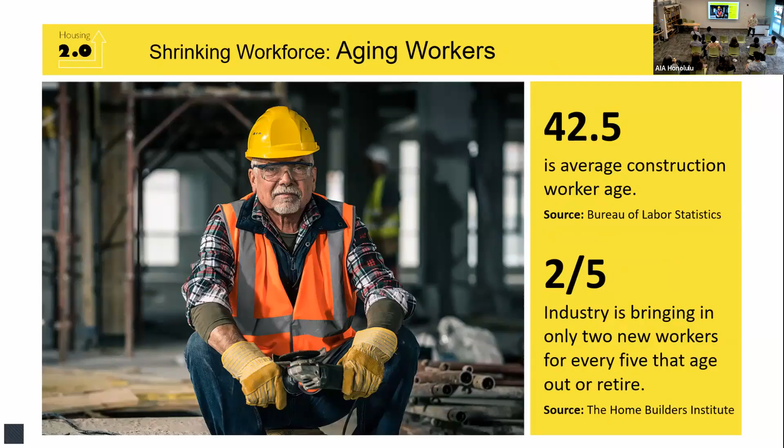Our trade shortage means 94% of construction firms are struggling to find workers. That's a problem because currently the average construction worker age is over 42, and the pipeline of new workers to replace every 5 that are leaving is only 2. So only 2 workers are coming in behind 5 retiring, while the construction workforce is already very old. We have a huge problem of where the workers are going to come from.

When we look at advanced manufacturing and how it can reduce costs, McKinsey & Company suggests it's a $200 billion productivity gap costing the industry that could be closed by using advanced manufacturing methods. That explains, in their analysis, why construction is so far below every other industry's productivity track record over time - about a 2x difference, with construction being the only industry decreasing in productivity.

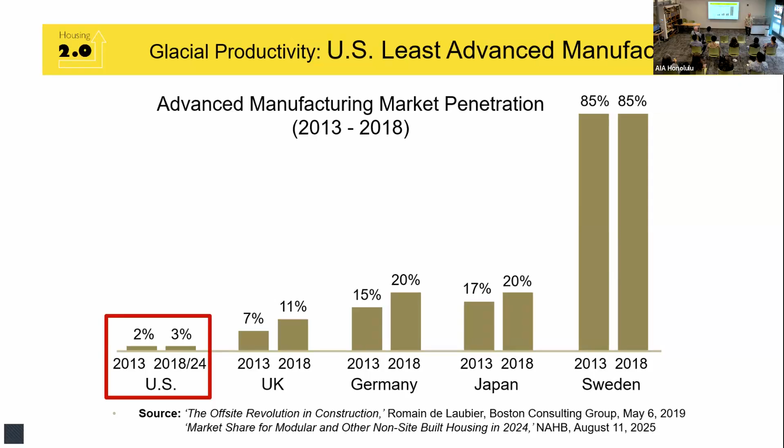So here's a $200 billion solution, and we're among the very last countries applying this innovation, whether it's digitization or advanced manufacturing. This data is from 2018, when we were at 3%, while other countries were growing from 7 to 11%, 15 to 20%, up to 85%.

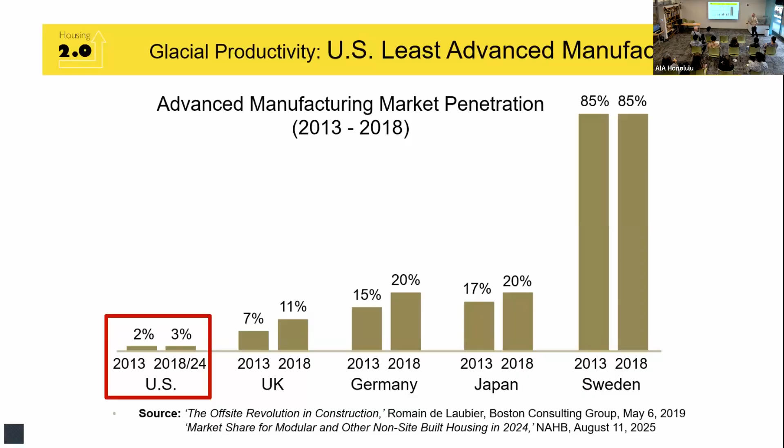In 2024, NAHB suggests that advanced manufactured solutions are still only 3% of the market, not counting HUD code homes, which are a different product for different markets.

So what do we do about all this? We have a 3-part crisis: highest income-to-housing ratios, a workforce shortage, and productivity problems. What are the solutions? What I'm going to suggest is that we have to optimize housing.

Where we're excessively hurting, we have to use optimization innovations to get better. The first innovation is going from excessive waste to optimized, lean practices - and I mean waste in all its forms. We can't waste land, we can't waste space. We have natural resources that can provide free heating, cooling, and fresh air - we have to leverage those. We have to make energy waste zero, and we can't waste in construction. Every element of what goes into a home, we have to eliminate waste. So waste is the biggest topic I'll cover - it covers a lot.

Then we have to go from excessive complexity to simple. We can't afford the kind of complexity builders believe many homeowners want. It turns out, from all the surveys, it's just the opposite - homeowners are wishing for more simplicity.

And then, systems as an afterthought is excessive - we have to move to fully optimized systems integration. Mechanical systems are an afterthought, storage is an afterthought, integrating solar and technology into a home - all of those things are an afterthought. If they're fully integrated, as they are in every other industry, there are huge cost savings just from integration.

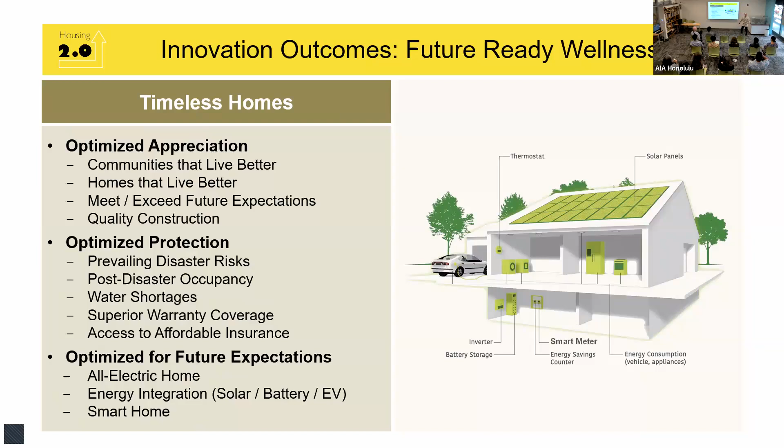The last wellness element is future-ready. The things we do will optimize appreciation, optimize protection against disasters and insurance and water shortages, and optimize for future expectations people have—smart, all-electric, energy integration, all the things we know are coming. So there's a lot here to get to, but all this ends up to big savings for how we get better for less.

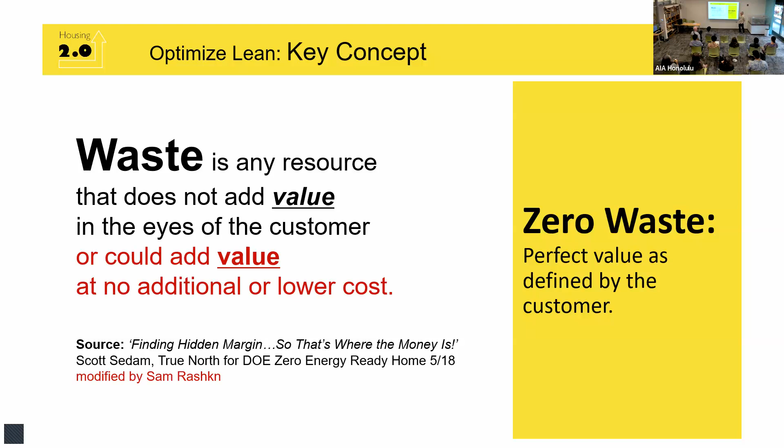Let's start with lean. I mentioned this is the biggest item because lean encompasses so much, but the key concept is waste is any resource that doesn't add value in the eyes of our customer. This is a quote, a concept from Scott Sedam—he's a very nationally, globally recognized lean waste expert who consults a lot of builders. I built on his definition of waste by adding 'or could add value at no additional or lower cost.' A lot of things we're going to cover today are where we have the opportunity to extract value at no cost or lower cost. That's waste, and we're going to really attack it.

So how do we start? Let's start with land, and let's get the most out of each lot. A lot of this will be in the full reference, we won't cover all today, but the two most important things you got to do in any piece of land is optimize views and manage topography. That's why these two are where everything begins. When you give them a raw piece of land and I want to provide housing, I got to get these two right first.

There's some natural views that can be captured. I have to get the most amount of lots accessing those views, but I cannot take any risk of drainage problems. That will completely destroy the user experience living in a home if there's erosion issues and home getting wet issues.

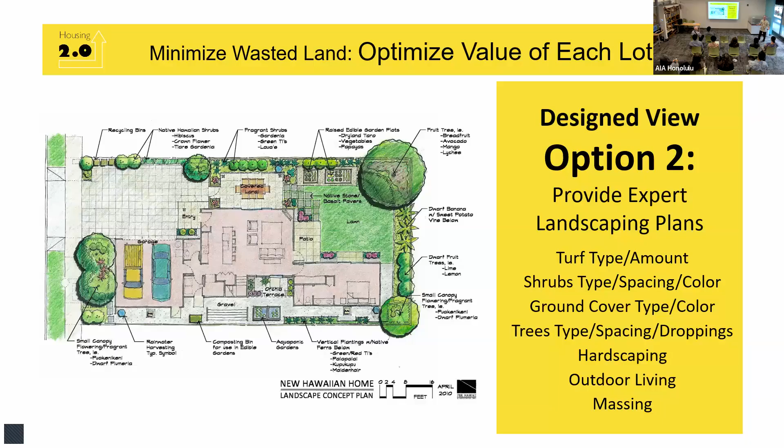When you make that choice, with the long, narrow footprint you get much less access to the backyard, whatever room happens to be there in back. Much less access to daylight, much less access to the street and community connection, and more hallway. I haven't had any homeowner yet, in decades of being an architect, ask me for more hallway space. It's never come up. So it's no value, yet I'm adding square footage.

With the square shape, all those things get better. I've got 10% less walls with this nearly square shape. I have double the view to the back, double the connection to the front, and more daylight. Everything's better at lower cost because I'm saving 10% on walls, maybe a few thousand dollars, and I'm also saving 10% on energy bills because I have less exposure. And I can get the same number of lots because it's the same square footage of land. It's a big difference - all from the geometric footprint in the planning process for whatever subdivision or community I'm planning.

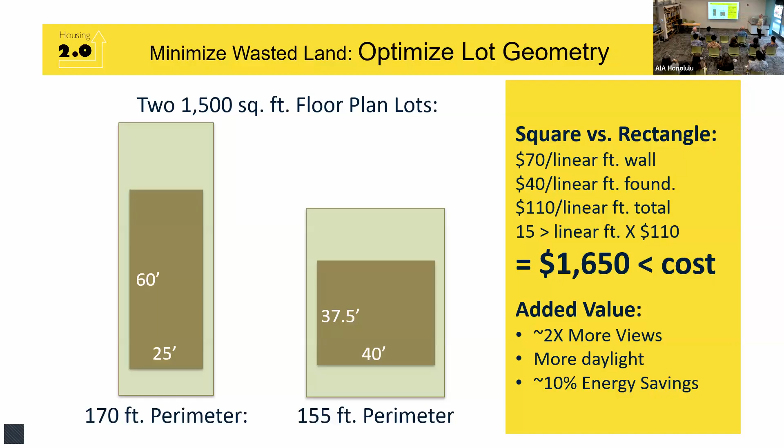The next thing is allocating open space. The value of open space, by one study, is $13,000 increased value for each housing unit located within a quarter mile of protected open space. I often show communities in the mainland - like Savannah, Georgia, and other communities with open space - that have 40-50% premiums because open spaces are built into the neighborhood. So over time, the cost of housing you're missing because you left the open space is overwhelmed by the appreciation benefit of having it.

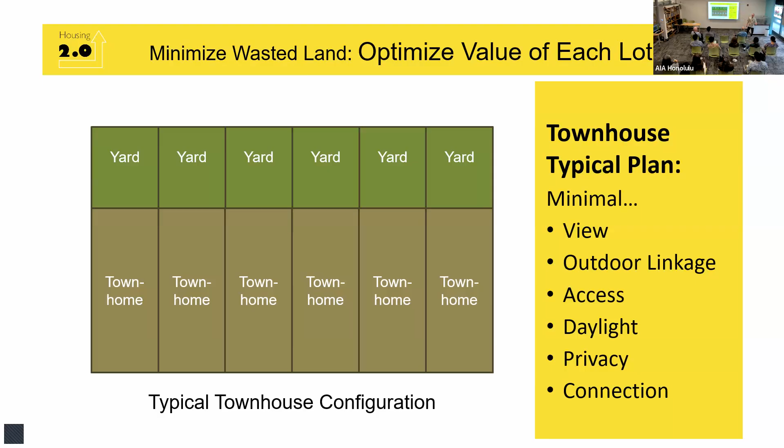So can we do better for less? This is the outcome - again, there's almost no connection, it's all garage. Then you go to the back and it's useless because it's not adding any value, hardly any access, and neighbors can look into each other's space. So get rid of this if it has no value, and repurpose it for more units to do things that are better.

So if we go to an L shape, get rid of the back that has no value, we create a valuable courtyard outcome that works completely differently. First, we can create a quiet side so we have complete privacy to our courtyard. When we look at the outdoor linkage, the entire footprint now has linkage to a desirable open space on the property. The secret sauce is people come into the courtyard to the house - we have a full front room and a full front lanai, community connection - instead of maybe an entrance walking through these rooms and breaking them up. So the middle entrance gets rid of the hallway space that adds no value.

Everything's being done with this lens: how do I make every square foot add value? How do I make every square foot of property add value?

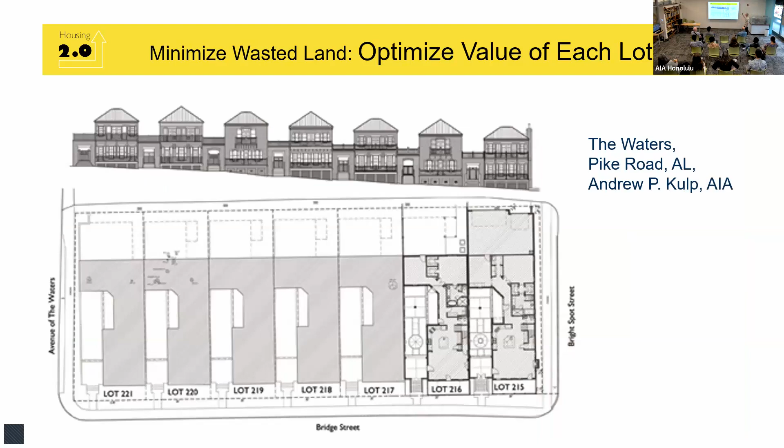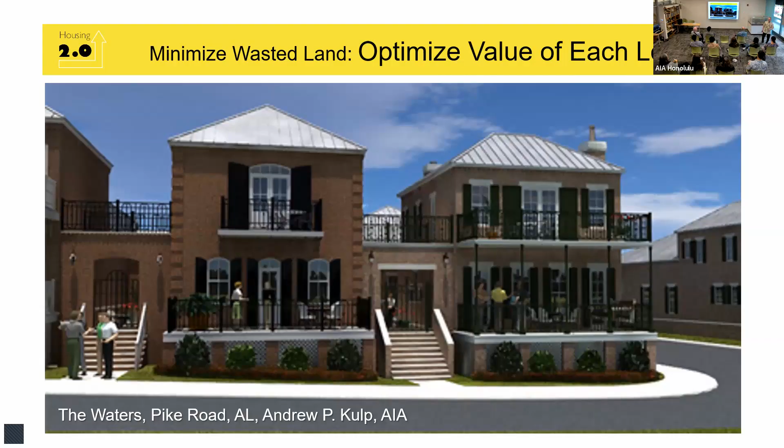Let me give you an example where I had to do this exact kind of thing with a client. This was their project up in Vancouver, Washington, which is a suburb of Portland, Oregon.

So they're building these duplex units. You wind up with no place to park. It's too narrow in the community. You have all the garages up front blocking any connection. These yards are set for access and daylight, but they're not useful. The side yard has no use. All the outdoor space almost has no use.

So I get daylight, connection, privacy, parking - the yards aren't useful, no access to it. This is how we can fix this kind of thing: just make it more narrow and have almost like a courtyard effect with the wider, narrow yard. Put the garage in back, using the backyard space that was wasted. Now the yard has full functionality. We have a front porch and we have connection - all the things we need to have.

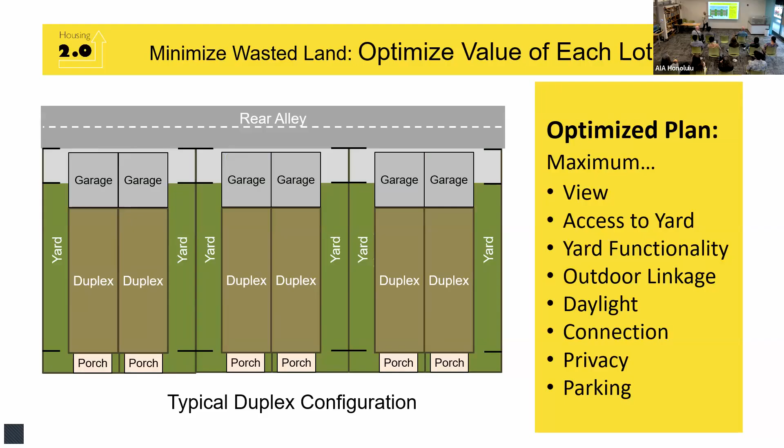So this is the floor plan. What we want to do is just use box shapes to show you here's what we had, and here's how I can make it work in a narrower footprint. Now I get the garage in back, I get that side courtyard kind of effect, and the rooms are all the same or bigger size from what they used to be. No extra square footage, no wasted space. Trash is in the back, cars in the back, front porches and streets.

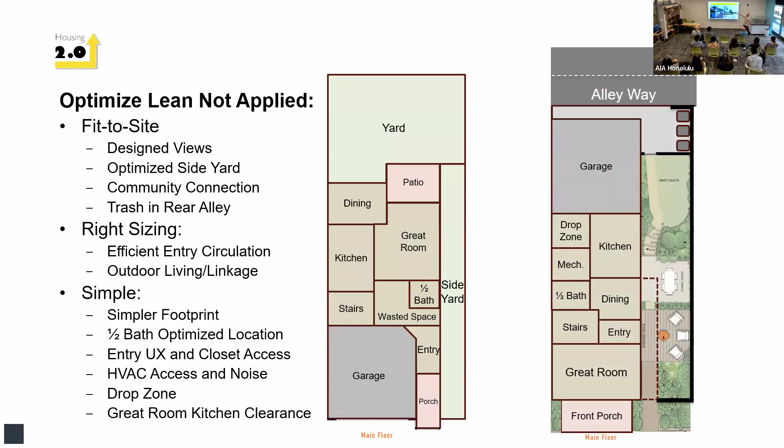So what we've done, we've gone from this, which is the actual project that's already been built - again, it's trash cans, it's cars, there's nowhere to walk, there's nowhere to park - versus we can have this kind of effect. Which street would you rather live on?

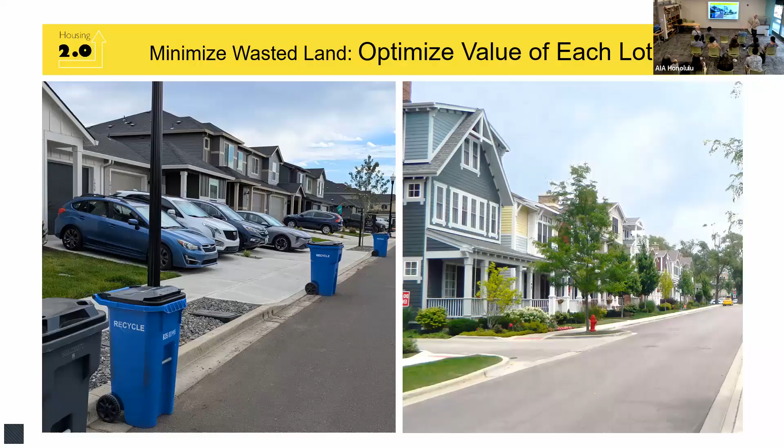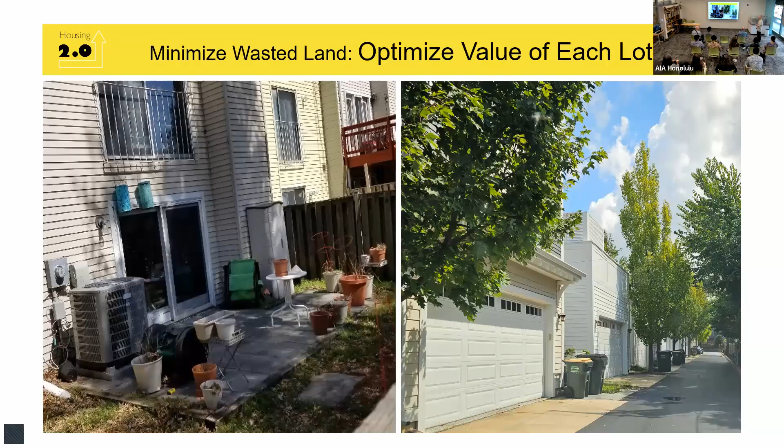So this is, again, trying to say: optimize - stop wasting any square foot of outdoor space, stop wasting any square foot of indoor space, and really apply best practices for connection, for daylight, and so forth. Research shows social connectedness is great for disease prevention, lower rates of anxiety, stronger immune system, better cognitive function - all these benefits.

You see it basically in neighborhoods that are designed for people to get out, to be active, to connect to the degree they want to. I'm not saying you have to meet everybody every day, but whatever amount you're comfortable with, you have access to it because it's designed better. 50% better chance of staying healthy, increased longevity - and that's with a study of over 300,000 participants.

So there are the options: there's Koa Ridge with a garage-dominated street, and here's Hawaii Kai. We have the ability to do this - I don't care if it's low income developments or high income developments. This isn't any appreciable cost. It's designed by design, it's integrated into our thinking and planning from the very beginning.

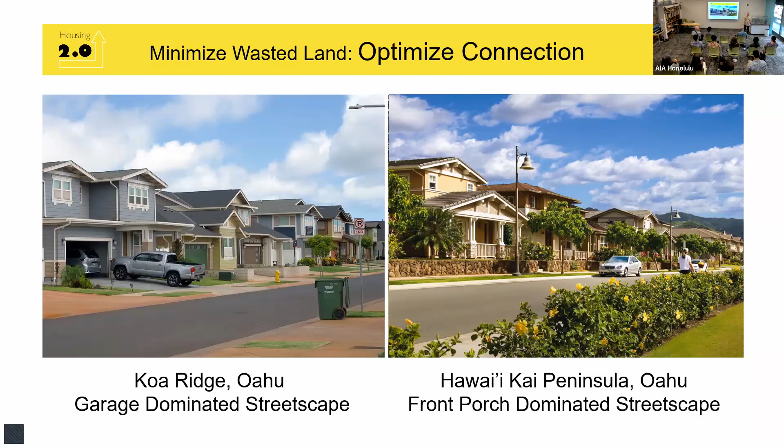To show you it applies to almost any level, I want to give you an example of what's done for a homeless village. This is the Other Side Village in Salt Lake City, Utah, but it can be done anywhere - it could be here in Hawaii, the same way. They applied all these concepts for a homeless village.

The first thing they did was find a piece of property that was just being used for garbage, with people throwing debris there. So rather than NIMBY being a problem for a homeless village, as it normally would be, they took a blighted piece of land and repurposed it so it would provide so much value to the community, providing a place for the homeless village.

And then they converted it with open space, connection, a wellness center. It had guidance and community farming for healthy eating, skill training for getting jobs and moving on to your own life, as customized designs that were advanced manufactured. All the things we're talking about were done to empower individuals to move beyond chronic homelessness.

So this is kind of the design. Went from this being just garbage bins and trash all over the property to a beautiful development. So they actually help the neighborhood rather than hurt it.

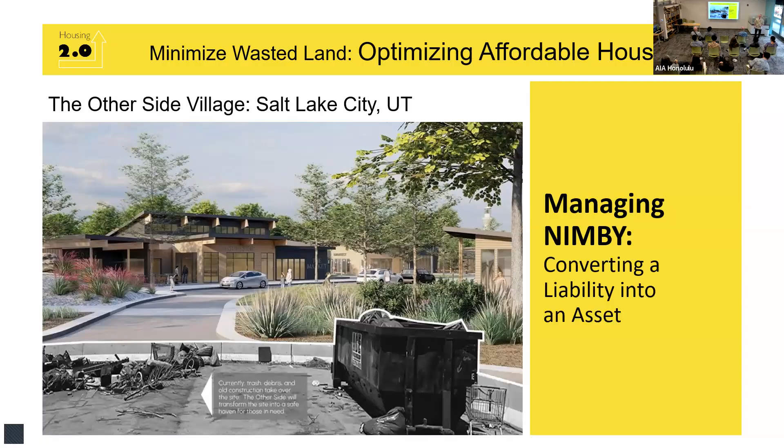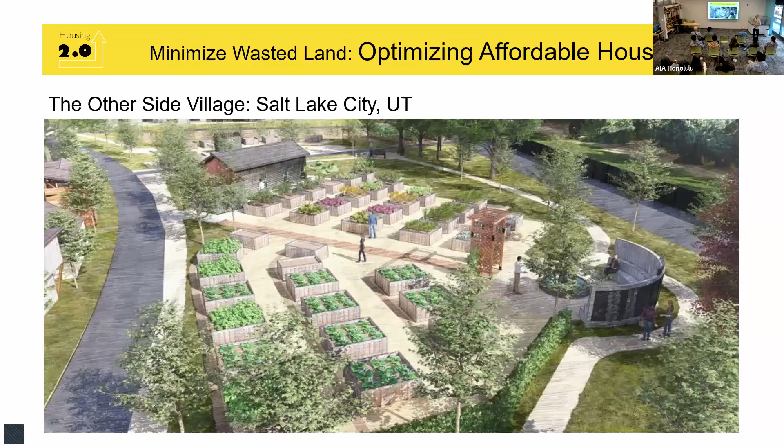And then they mass produce these living units in a factory. Would be kind of tiny homes. Then they put them on property with trails, with open space. Again, you see front porches on homeless homes for connection. Everything they're doing is applying the same fundamentals we're recommending. It had community farming for healthy eating and training about healthy eating and skills development. And these are the kind of results that you get.

In their case, with the first block of, I think, 170 and adding another 400, because they got these results, it's just amazing outcomes. 100% housing stability, formerly chronic homeless, now in permanent housing. 100% sobriety and recovery for the majority of them, coming in with all sorts of issues. They help them right away. 100% employment. The skills they gave them led to jobs for 100% of the residents.

75% got better health. But the costs, this is lower costs, this is better for less. They reached 185 million in savings due to reduced costs of emergency services, shelters, police, ER visits, detox, healthcare, all of the costs that went away for these residents because they went with this approach, plus they all had higher incomes when they left, obviously, from where they were.

But you've got to measure results, because then you get the funding to do the next phase, the next phase, and the next phase. And concepts just work over and over.

And I'll leave you with this about wasted land: everything I'm talking to you about is in lockstep with what they find are the fundamentals for how blue zones work. One, people move naturally. Having open spaces, having community gardens, having trails, having ways that people interact creates movement and activity. It's incredible for health.

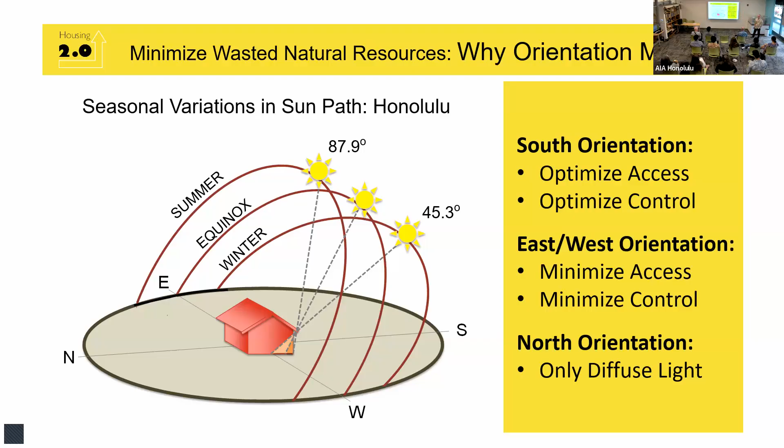North is good for diffuse light, right? The big thing is orientation gives you control, helps you create better environments. In absence of it, this is what you're doing: people have to basically just put blinds in front of windows all day long. What is the purpose of a window? Anyone guess? Why do we have a window in the first place? Why don't we just make solid walls?

Ventilation, maybe fresh air. Egress, get daylight - that's what mitigates the purpose of the window in the first place.

If you don't consider orientation - east-west lots, if your home's oriented front to back with the windows - it's easy to do, it's just not being thoughtful.

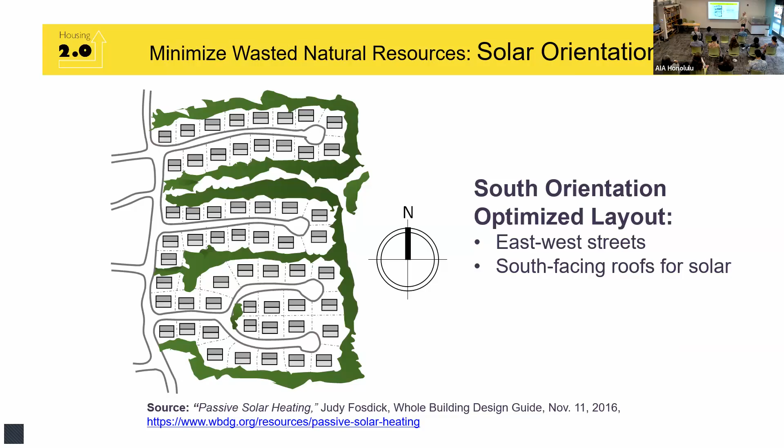If you do it properly, basically it's 45% free cooling. This is a study in California, and if we're cooling in climates like Hawaii, which is like the California coast, about 45% savings just from orientation.

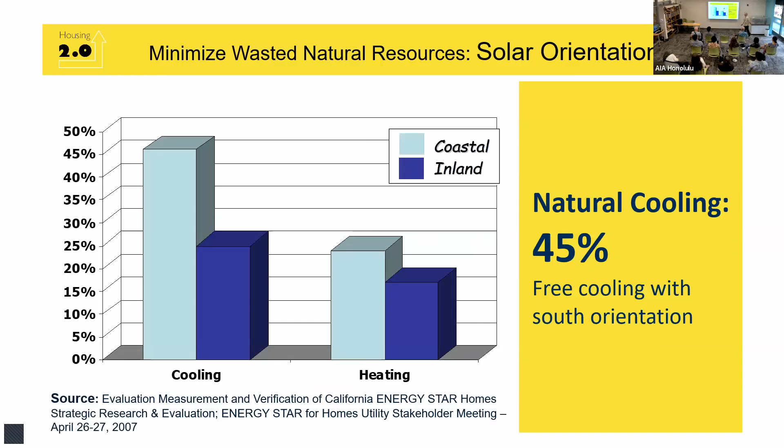But more importantly, natural light - I put the blinds up all the time because I'm getting all this glare coming through, versus if I manage the orientation, I get all the natural light.

98% of homeowners, designers and architects score natural light as a top home feature. And again, you're blessed with it here in Hawaii. It's a natural resource you want - you don't want this, you want that.

It improves vitamin D, wards off seasonal depression - though that doesn't happen so much here in Hawaii - improves sleep, and enhances productivity.

So like I said, we want to do stuff that's free that makes things better. It costs zero - that's orientation, free heating and cooling, free cooling, summer comfort, superior comfort, thermal mass.

I'll talk about thermal mass in a moment. Natural light, natural cooling, fresh air, and resilience - if it's a really long, protracted hot spell and you've got a power outage, you can float with thermal mass and orientation.

So I believe this is worth tens of thousands of dollars. If it reduces your electric bill for heating and cooling by 30-40% over 30 years, that's tens of thousands of dollars.

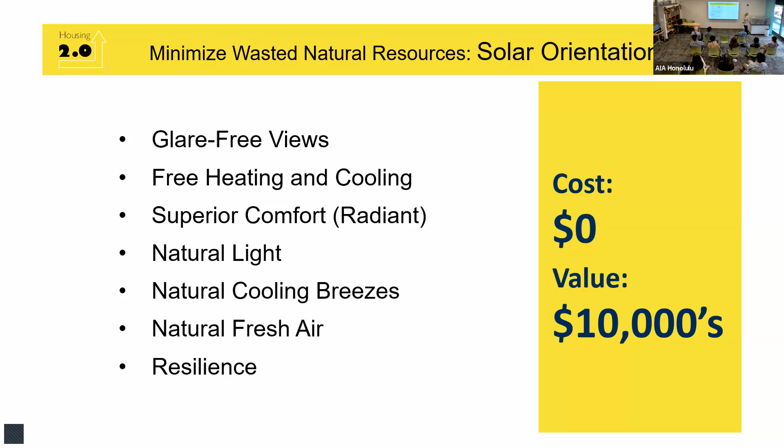Here's an example with another client. This is the original site plan. Here's north, here's south - all the units front and back, 85% of glass facing east-west.

Which means all those units have the blinds closed every day, all day. But 100% of units are basically exposed. It's unbelievable - 29 units, 0% optimized comfort, with lights blazing.

So all I did was reconfigure it this way. I got 33 units - 4 extra units, right? And basically all these units are now oriented north-south.

Plus I threw in a couple of pickleball courts because this is a busy street - no one's going to use that playground. And you can see basically...

Not spending more money, and I have 4 more units, and they add value. It's being thoughtful about natural resources and getting to better answers.

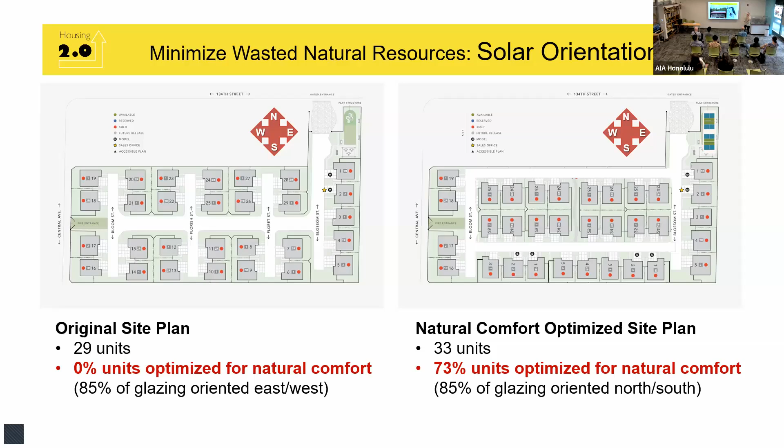The surface of stucco will get up to about 140 degrees with the sun hitting it. We're stopping all that - thousands of nails in the wall are perfect conductors of heat, so we reduce the heat getting through into the studs and into the house.

And I mentioned thermal mass. You don't need thermal mass for heating here in Hawaii, but with the 45-degree angle of the sun in the winter and all the sun coming through with south orientation, it's nice to have a thermal battery to store that heat so you don't overheat during the day.

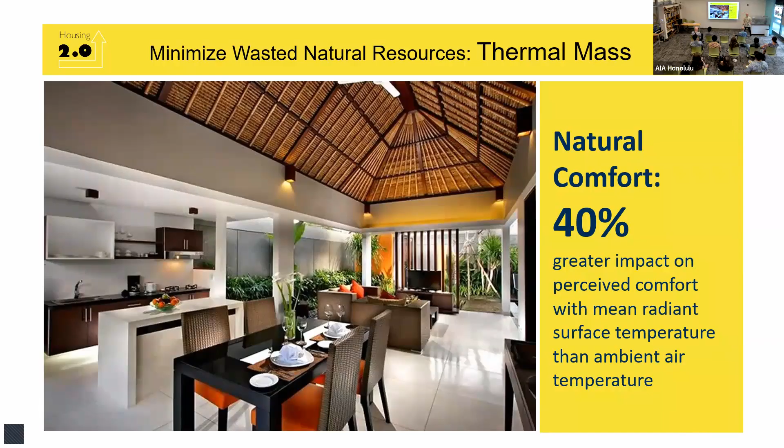So you get 40% greater comfort by controlling the mean radiant surface temperatures - that's what thermal mass does for you, gives you a little bit of control. So if you have slabs, I might consider using tile rather than trying to put a wood floor on top.

Here's an example of how you can be thoughtful doing all this. This is Kumuhau nearby, on the island of Hawaii. This is a development that's oriented to prevailing breezes - it's using the overhangs, it's capturing the sun, it's capturing the breezes.

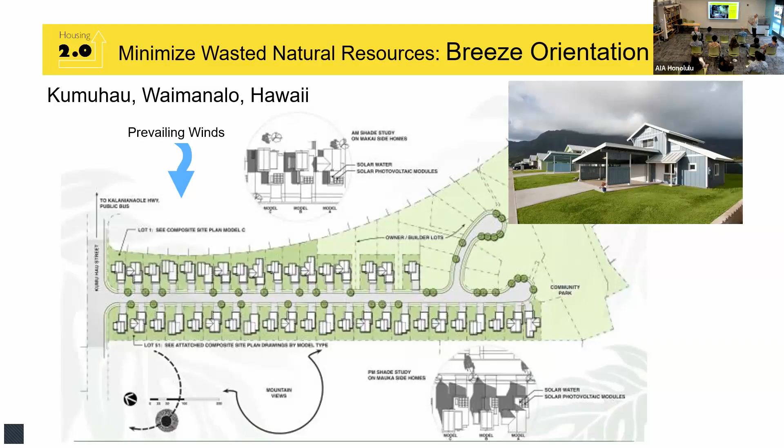We have examples where we're doing this - these are good examples to follow. And again, when you see a home that's just capturing all this fresh air, you know it just feels great inside. And casement windows are your friend.

They give you the full aperture, but the big thing you have to know is which angle, which side do you hinge the window on - that's in the book, we discuss that in greater detail. It's amazing the difference in how you make the casement windows open.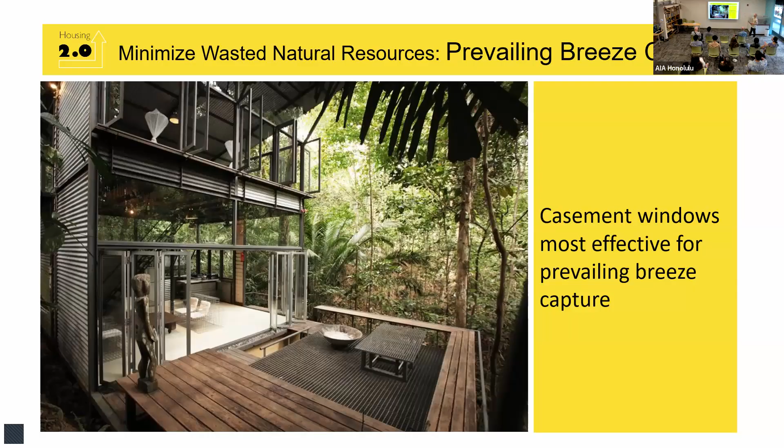Cool roofs are just a way to, really effectively, with no moving parts, reflect more sunlight, so you get a 40-degree improvement in the heat that comes through the assembly. So that's a big benefit.

So here's Bermuda, another island on the Atlantic side, where every roof is almost white by design - just to get all the benefit of that free cooling.

In contrast, it's just as hot in Melbourne, Australia, yet there's a real prevalence of dark roofs, which absorb heat and exacerbate comfort and cooling problems.

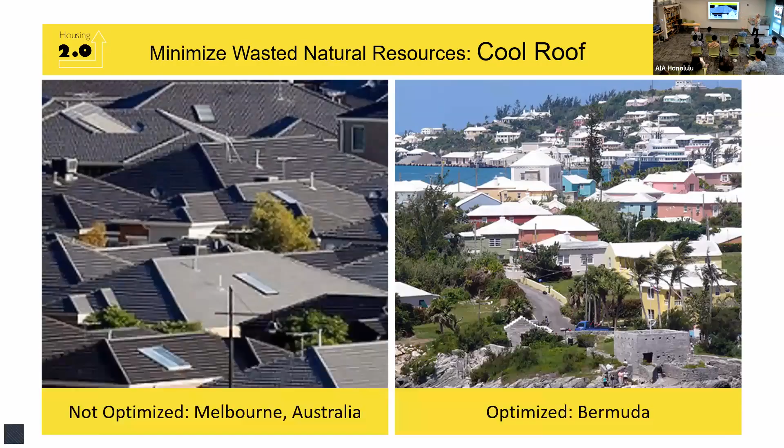And cool roofs can come in standard shingles, so you don't have to sacrifice design - you have a lot of design choices.

Right sizing is about maximizing the value of every square foot you put in, at the highest level. You do that two ways: you optimize the space you have, through geometry, floor plan, circulation, and you want to minimize but make feel generous with built-ins.

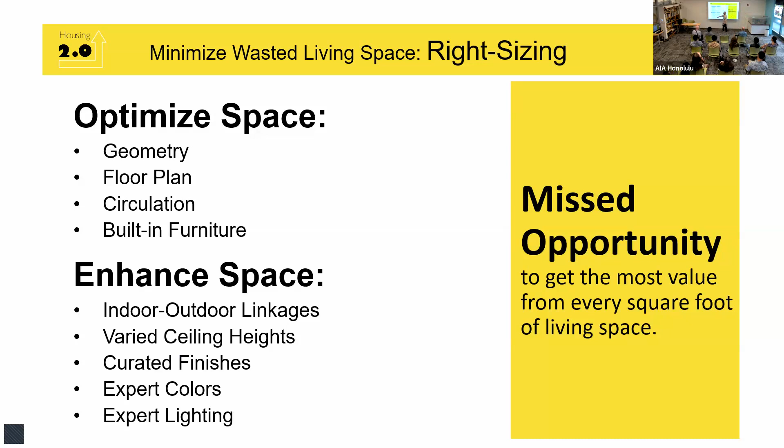Then you want to enhance the space you have so it's perceptibly bigger and lives big. You do that with indoor-outdoor linkages. When a room continues on to the outdoors, it just lives bigger. Raising ceiling heights, or varying ceiling heights, makes rooms feel bigger. Curated finishes, expert colors, and lighting all contribute to being sumptuous.

This concept has been embraced by the auto industry. Here's a 1970 Impala and a 2020 Impala. There's about a two-foot plus difference in the wheelbase. This one has the same or more trunk room, headroom, and leg room, has more storage space inside with cup holders and everything else, better safety features, more reliable performance, and better acceleration. Everything's better about the car, but it's smaller.

We can do the same thing with housing. So one of the first big things we do...

Open floor plans just make spaces feel bigger, a 20 to 30% bigger perception of size. Indoor-outdoor linkages are great because almost 90% of homeowners want to invest more in outdoor living. Here in Hawaii, we're better suited for that.

When you have indoor-outdoor linkages, a room feels so much bigger, it just extends outward. And then capturing outdoor living, having useful spaces outdoors, matters too.

This is one of the more controversial concepts I go over a lot. Let's start with research about clutter. Basically, clutter creates stress, increased cortisol levels that become chronic, and an inability to focus that kills productivity. We all see this every day — if our desks are cluttered with papers and we're not getting to things, we almost become paralyzed in productivity. Our homes are no different.

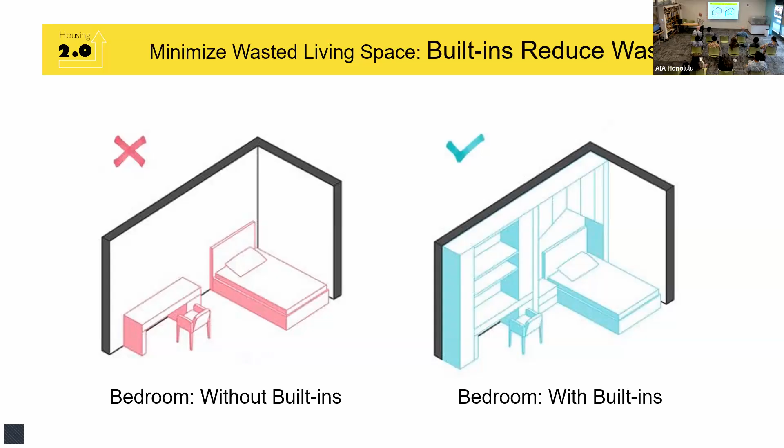Here's an office space with a freestanding desk. If we have a built-in desk, shelves, and storage, everything feels bigger — just a small alcove creates a more functional, more sumptuous office, and a bigger overall office space in the house.

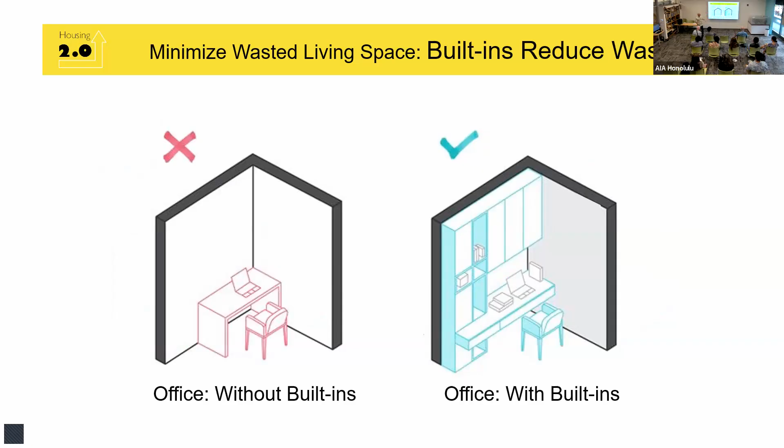Here's an example of how this all applies. The space below a stair is usually dead space, often used for a minor closet that has very little value. In contrast, by investing in one desk built-in here, one unit here, and some shelving — not a lot of cabinets — I've converted a small, minor-value closet below a stair into a work-at-home space.

And the value here is maybe 5 to 10% higher per home, because instead of a 3-bedroom, 2-bath house, I'm a 3-bedroom, 2-bath house plus a work-at-home office, all by taking a hardly useful space and converting it.

At the very least, even built-ins can make the space so much more attractive, more storage, display. So I have this constant battle with builders about investing in built-ins. Again, it's going to be cheaper with the square footage you offset to include them in your home.

So here's an example. I have built-ins everywhere. This is a design I did that'd be a great way to do a house in Hawaii with plantation style architecture, a lanai in the front, a lanai in the back, mounted kitchen cabinets, island, work-at-home space, a large screen TV and living space.

You have a huge master suite, large closets, storage, compartmentalized showering and commode, 2 sinks and a bathtub, and then compartmentalized bath, bedrooms with dresser and shelving, dresser and shelving and desk and shelving, dresser.

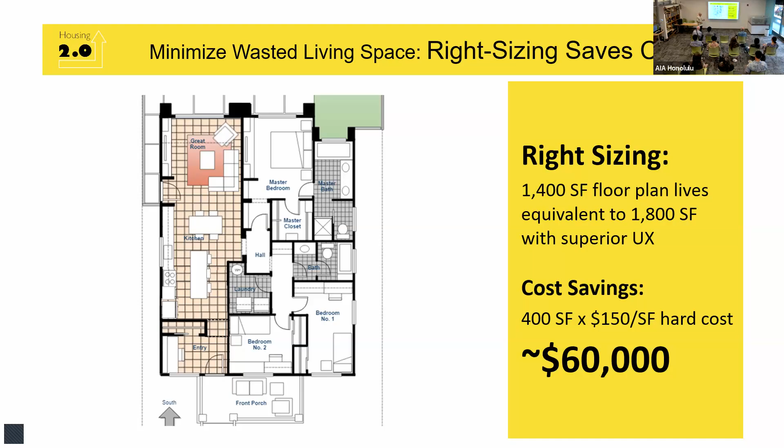But basically, this is when it all comes together. This is how we get the kind of cost reductions I was promising you at the beginning. How do we get 30–70% cost reductions? So right-sizing is great.

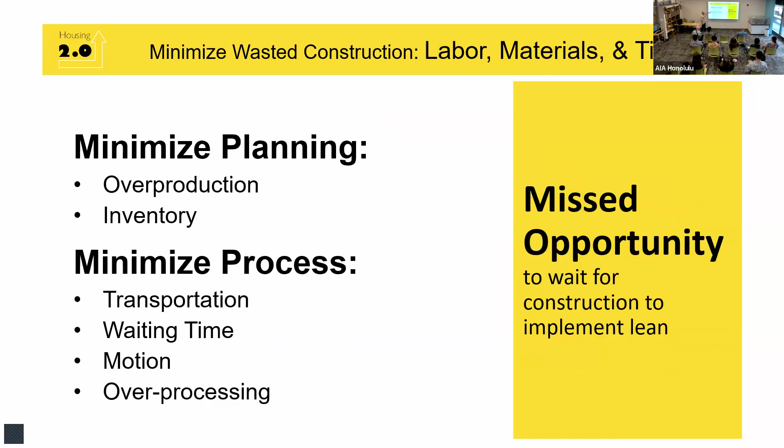Construction is about normal quality assurance programs, planning, overproduction, inventory, minimizing process, transportation, waiting time, processing. There are experts that can talk about that. So I'll move on to waste and energy.

Again, I don't want to cover too much here, except that you don't need to make this too complex. You're blessed here in Hawaii. It's very simple for me. Maddie from the energy office, finishing her internship, has developed a really great checklist you can look at, which covers virtually a lot of things I do on the efficiency side: enclosure, equipment, components. What I'll add is indoor air quality.

Almost no extra cost—you could use low chemical and low contaminant choices. And also you can have dilution with good fans; bathroom fans are good for diluting the house, and kitchen fans for diluting cooking emissions. And you have duct systems, you can consider high capture filtration in those duct systems.

But it's not too hard to do with a zero energy home. We reduced all the loads so much now with these strategies that you could put a very small solar system on at the beginning, or in the future be ready to go.

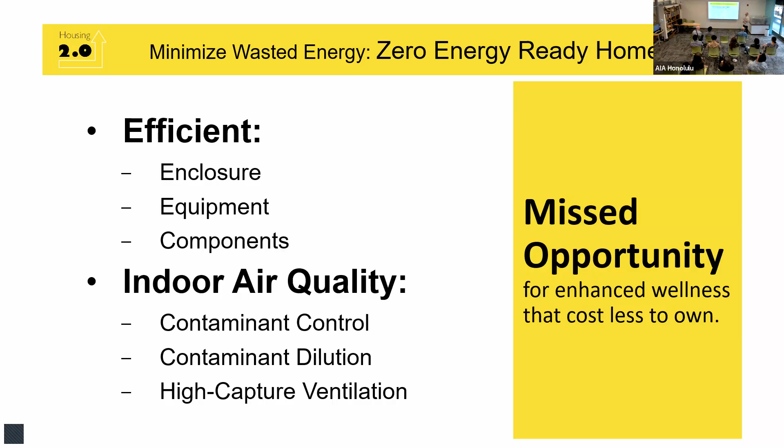But the key thing I want to talk about is moving beyond zero to avoiding obsolescence, wasted future readiness. It's easy to predict the future—you do it accurately—all you have to do is leave out the parts you could be wrong about. The key is knowing to distinguish between soft trend and hard trend.

Does anyone know what a soft trend might be? An example in the home? Paint color—anything like that is a soft trend. Counter color, type of siding. There's so many things that will change. Next year there'll be a different style.

But some things won't change. You know, certainly won't change. We're always going to want to feel healthy living in our homes. We're always going to want to feel like we have a lot of storage. We want a lot of daylight. We want a lot of fresh air. The things that will just never go out of time.

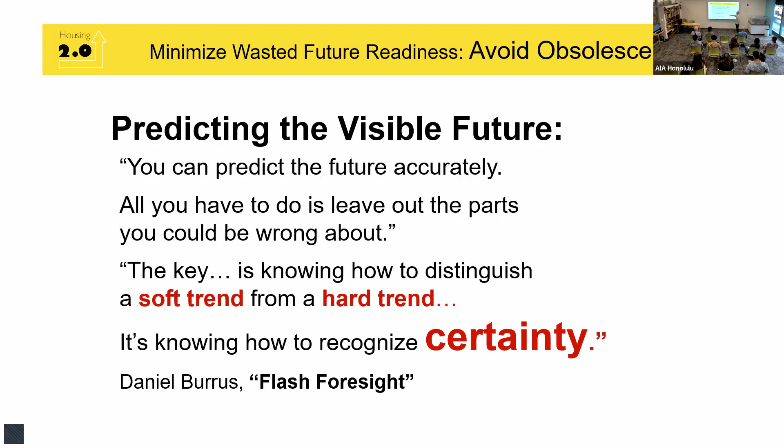Our homes are going to appreciate more. So how do we invest in things with certainty that add value and avoid obsolescence? There are four that I want to talk about: one is cost-effective solar, one is disaster risk—which is increasing exponentially in magnitude and frequency—more water shortages, and smart all-electric homes.

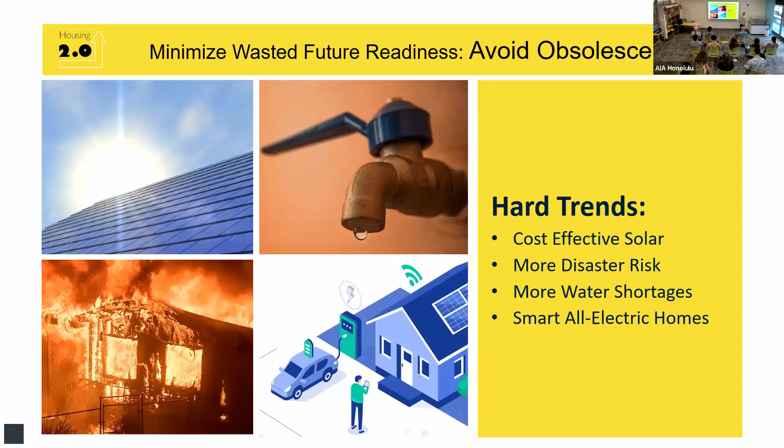So starting first with solar. Today, the cost of solar installed is roughly 6 to 15 cents per kilowatt hour. I don't know, here in Hawaii, your prices—are they much higher than the mainland?

Like anything else? Yeah, we're probably closer to like 40 or 50 cents per kilowatt hour. Okay, so 40 to 50 cents installed. And what you say, 42, it's about right. Yeah, the utility electricity is about 42, 43 cents. Right.

The national numbers, when I query what's the net cost of solar per kilowatt hour, the AI queries tell me about 6 to 15 cents per kilowatt hour, citing all the studies I've got. But even if we double this, we're way below cost of utility power.

So at the very least, if we don't include solar because of the front-end first cost, you've got to be solar ready. For virtually no cost, you can negate the cost penalty for putting it in later rather than during construction, and you can negate the disruption to the homeowner from drilling through the house and running wire. So at the very least, be solar ready, and recognize solar's coming in the future. Design for solar so you don't have plumbing vents coming through the south side, and have enough south roof for solar. There's a lot of things you should be doing because they're cost effective and will be more so over time.

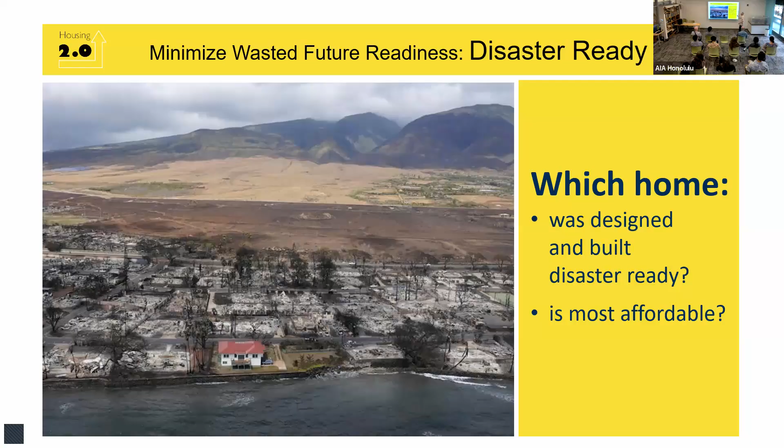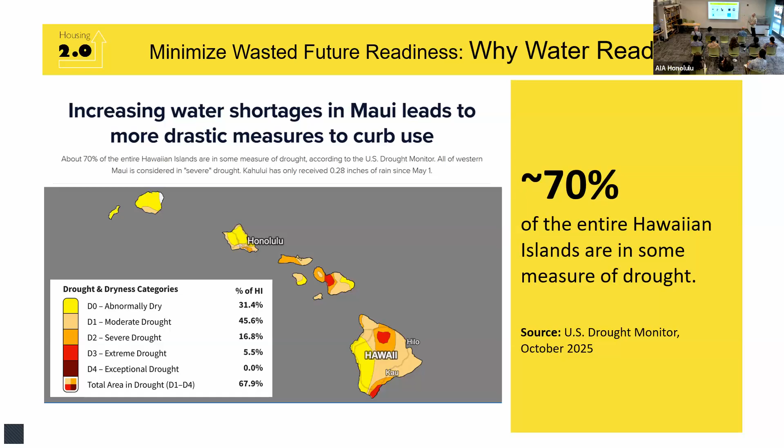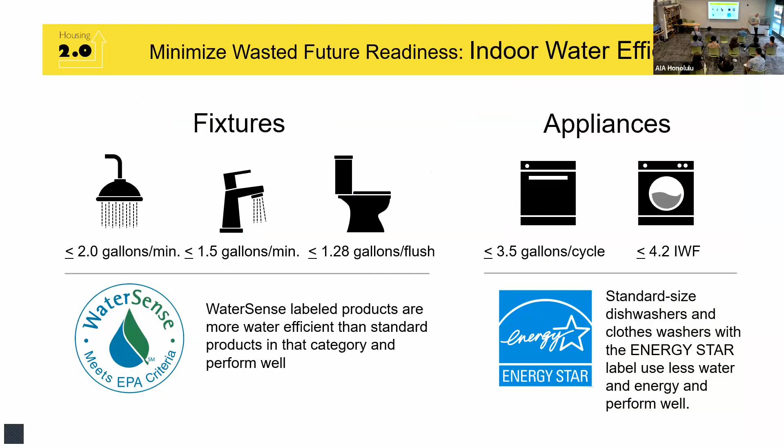I mentioned water is the future you're going to deal with, that water is more challenging. A couple of days ago I pulled from the U.S. Drought Monitor the drought maps for Hawaii - 70% of all Hawaii islands have some measure of drought, and you all know water shortages keep getting worse. So design for it. It's easy to specify WaterSense fixtures, which are much more water conserving, and Energy Star appliances will save you about 40% water use as well. Outdoors there's a lot you can do - efficient landscape and irrigation systems and controllers, even more mainstream solutions like rain barrels, smart water monitors, and greywater recovery. There's lots you can do for outdoor water use.

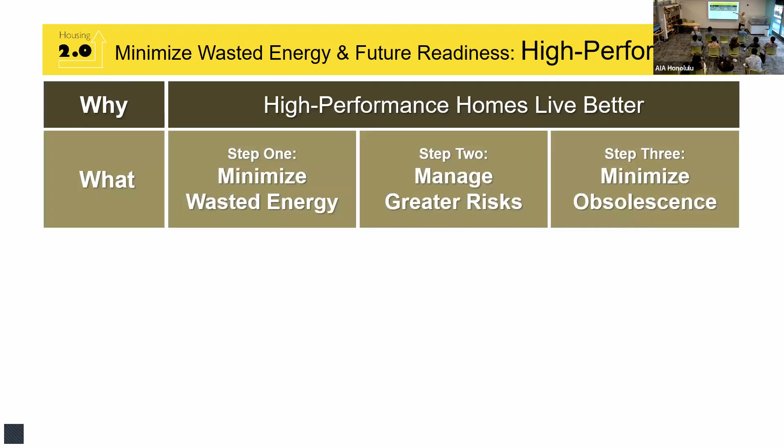If you put all this together - future readiness, energy optimization - to me that's a high performance home package. They live better, that's why we do them. We minimize energy waste with efficient enclosure, efficient equipment, efficient components. We manage risk by moisture protection, low load comfort systems, and indoor air quality. We minimize obsolescence by being ready for solar, ready for disasters, ready for water shortages, and ready for the electric smart home future. That, to me, is the framework for high performance.

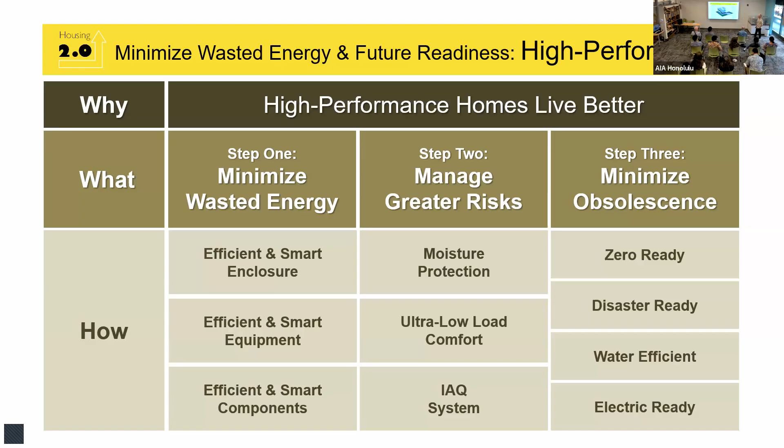It's just crazy how much complexity builders think homeowners want. The floor plan, the architecture, the details all contribute to cost savings. Leonardo da Vinci said it best: simplicity is the ultimate sophistication.

Surveys show 80% of nearly 1,700 Americans wanted homes that were more simply designed. You've got to catch up to where people are. So anytime we do something complex, we add costs.

Let me show you why. Let's say we do a recessed porch in your home. I have to build this wall and this wall because I'm moving this wall back 12 feet, so I build this 12-foot wall. I give up 200 square feet and I have to build those walls. So it's almost 3,000 dollars more for just 200 square feet. That's how complexity works.

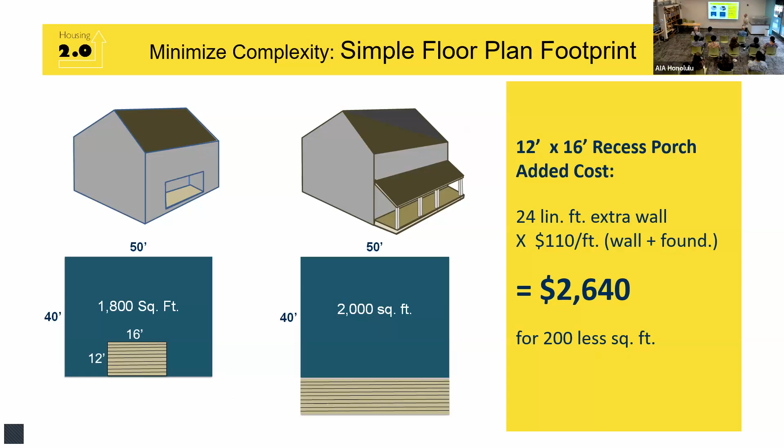I've got 15 minutes left, I'll show you one more. This layout for a 3-bedroom, 2-bath has 6 corners. It has these 2 corners because I recessed the master bath window for privacy from the outdoor living area. I could have brought this up here and avoided those 2 corners. That 3-bedroom, 2-bath home has 15 versus 6 corners. That's going to cost me an extra 14,000. So you get the idea.

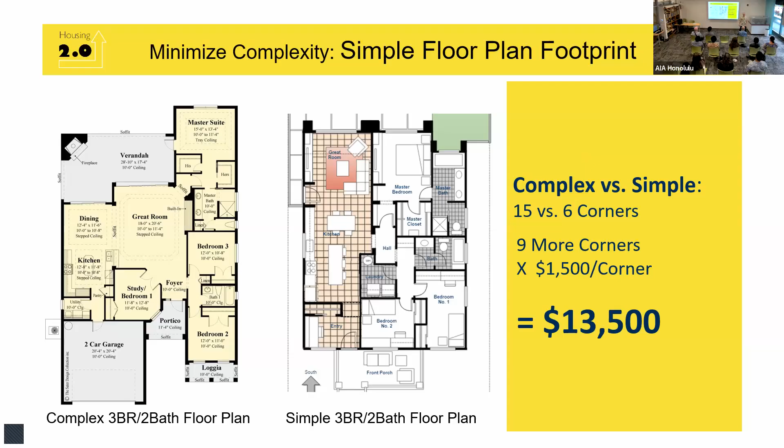I'm going to move to the last section since I have 15 minutes left, but you're getting the gist of what I'm trying to do. I'm trying to build better for lower costs.

I'm going to—I want to show you one.

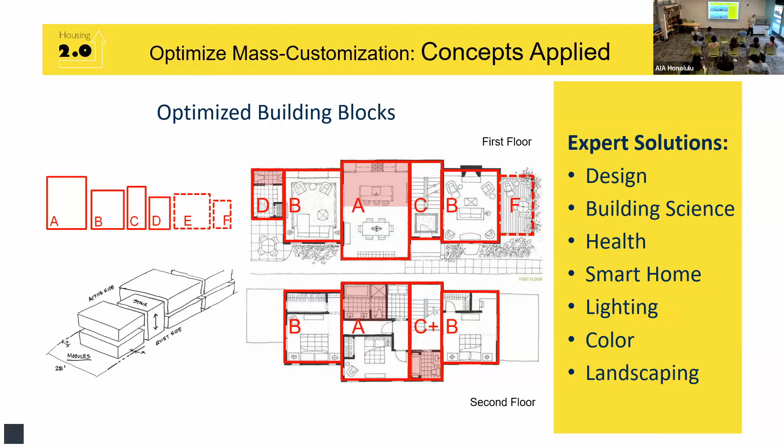I do want to show you what mass customization is like. Six building blocks can be configured to create floor plans. By having a limited number of choices on number of stories, plus another set of building blocks like pop-out windows and front porches, you create a lot of diversity. It looks like this—even though I'm building the same 6 building blocks, I can make the street look pretty diverse. Pretty powerful stuff.

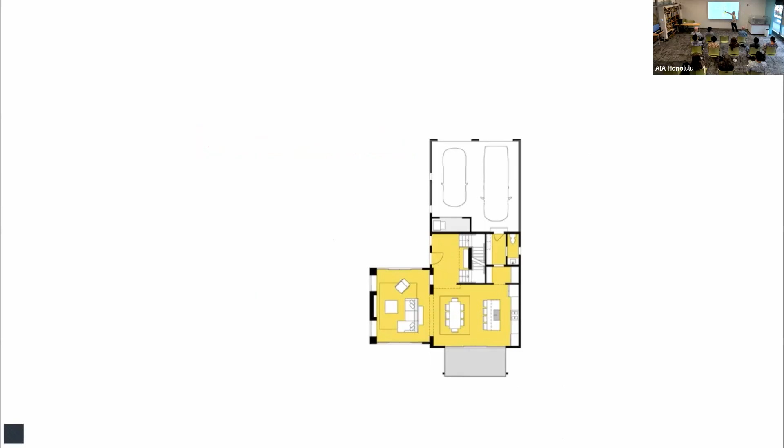It's pretty powerful what happens with mass customization. So on productivity, basically once you're doing all these things I just talked about—plain, simple systems integration, proven innovations for quality, mass customization—

now you're ready to digitize. It's digitization worthy, and now you're going to build it over and over again, with building blocks optimized for how the manufacturers work themselves.

The car industry will build a whole car completely on a computer first before it goes to the factory—the exhaust system, the engine, the cooling system, all the shocks and supports, all the safety systems, all the interior comfort systems. Everything is built and optimized in the computer. We use these analog drawings—even the computer-developed drawings are analog. It's horrible. We can do digital and be faster, better, cheaper.

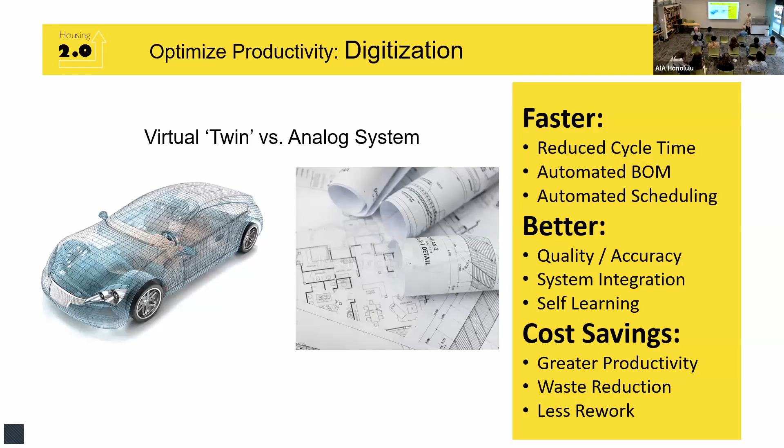I'll skip back—this is insane, glacial, and we have all these options for advanced manufacturing: framing kits, panels that are framing, structurally insulated panels, insulated concrete panels, modular building blocks, and hybrids of, let's say, modular kitchens and bathrooms, panels for the rest of the space. Additive methods are precast concrete and 3D printing.

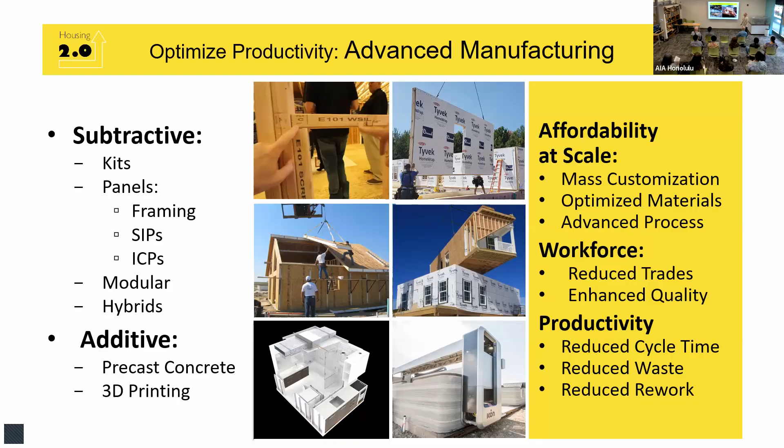So this is a framing kit, where I take a plan, get the CAD drawings, convert them, do the cutting, and automatically create pieces, number them, and install in the field with very little waste there—more waste happens in the factory. With framing panels, you make the panels in the plant, bring a crane on site, set them, and you have your home. That's faster. SIPs usually use cranes too, with panels set in the field, giving you an elegantly simple way to create a home that's highly insulated.

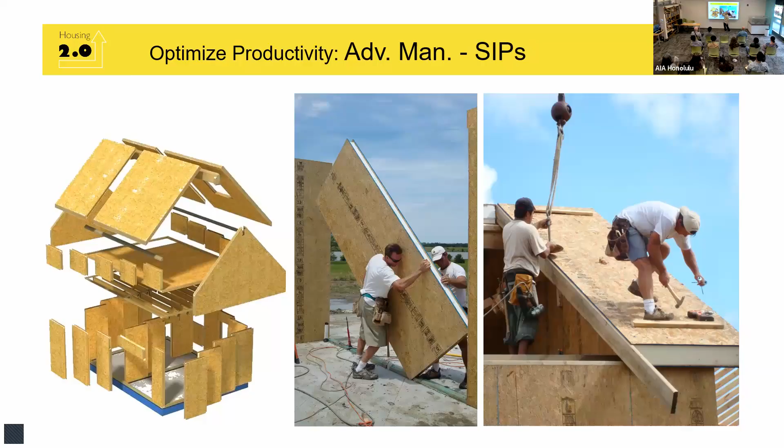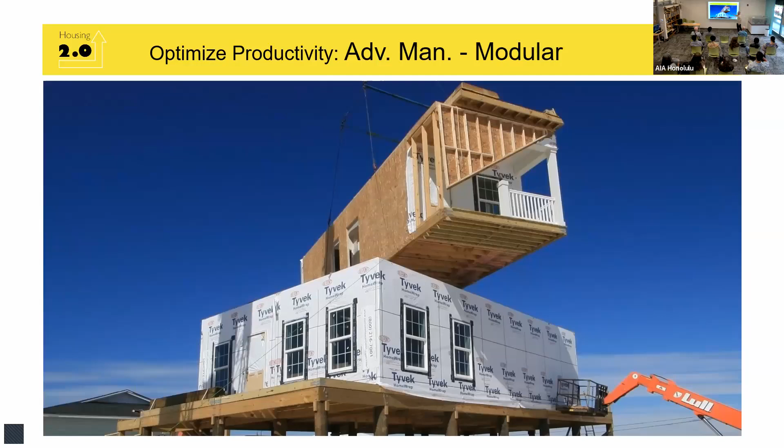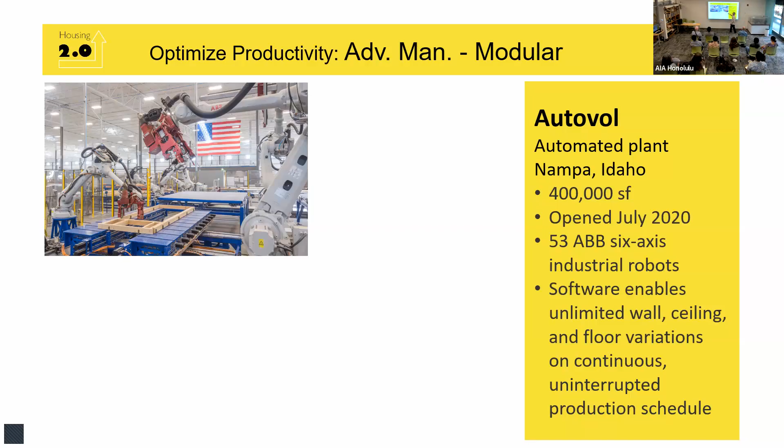Volumetric or modular, build the boxes in plant, go out in the field, either pre-finish or finish in the field, they're set very quickly in the house. This is an advanced manufactured plant that uses a lot of robotics, making modular units for multifamily. Autovol has 53 ABB 6-axis robotic machines in the center, around the perimeter, and pieces that are made on rigs and assembled.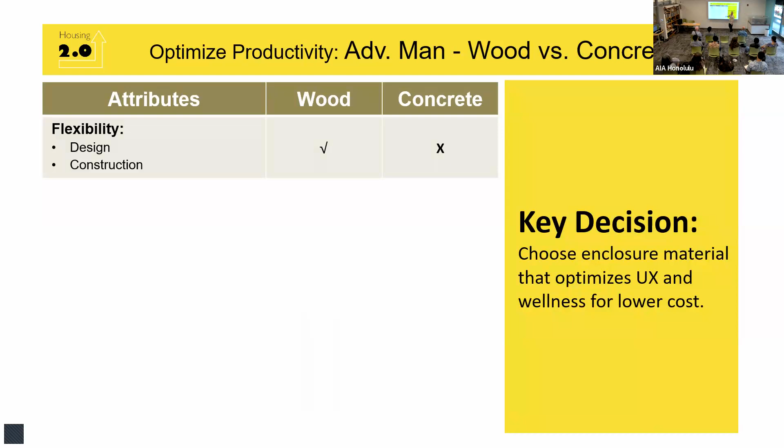But the big question I want to raise is, should we always be doing all this with wood? Wood for sure is much more flexible for design and construction versus concrete, right? But let's compare everything. Regarding moisture and humidity risk for mold, rot, dimensional and warp stability, expansion, contraction, concrete is far superior to wood. For disaster risk, high impact resistance, pest and termite resistance, wildfire resistance, storm resistance, wood's pretty rough, concrete is much better. For construction costs, job site waste, minimizing labor, minimizing job site protection, wood versus concrete.

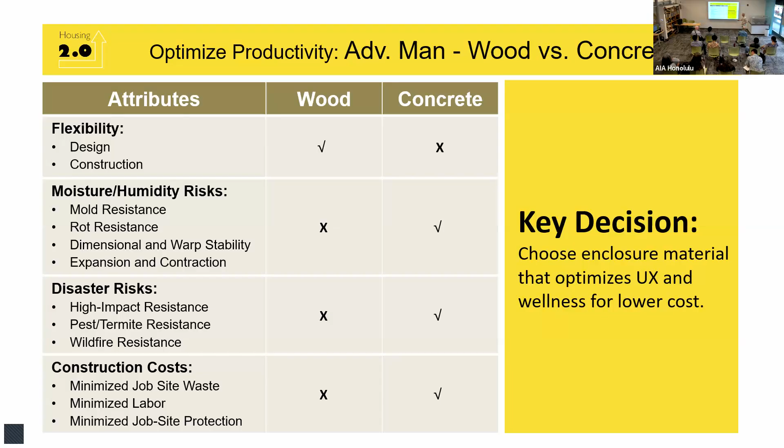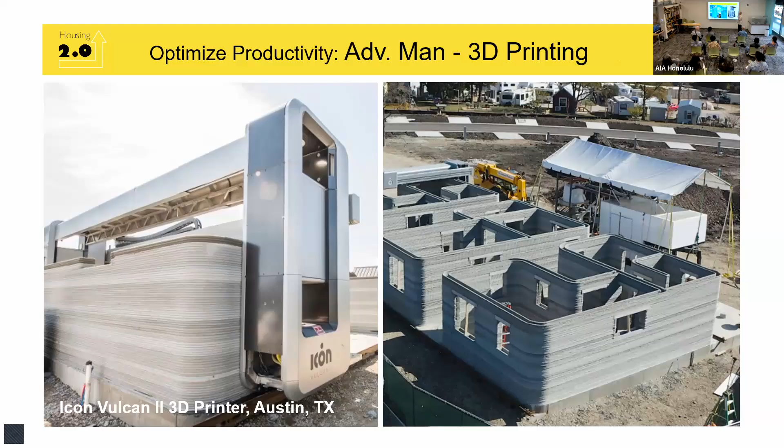3D printing, the printer could be a single axis machine in the middle of the home, or you have it going around each side and it just moves up back and forth like a printer. Prints ink, but you print your home 24/7. You're making this home just coming right off the printer. Keep pumping more concrete into the mix. Termite resistant, impact resistant, fire resistant, storm resistant, very different. And I like this technology a lot, but it doesn't get a lot of traction.

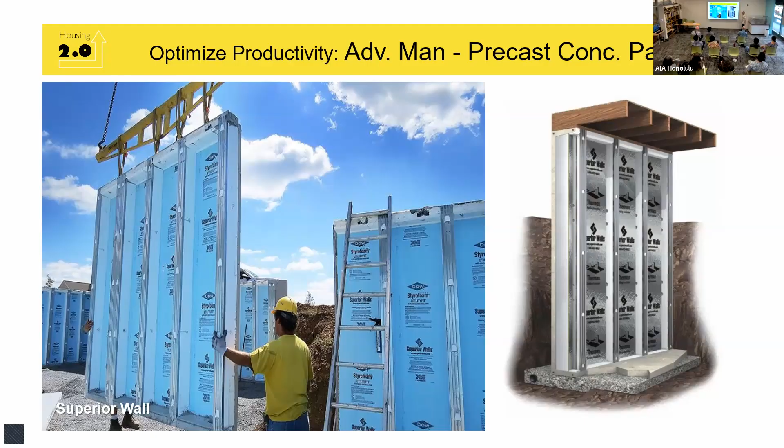These are precast concrete panels. So the insulation's on the interior, R10, but the rib construction mitigates 70% of the concrete. It's a normal concrete wall. So I'd say 70% of concrete, yet it's stronger because it's like a big bond beam as it connects down all 4 sides. And it has metal tabs on each rib, so you put your drywall right against it. And it has all the holes running the plumbing and wiring into it.

So this is the walls above grade building a home. You have R10 insulation, which is double. So you could make these with R5 if you wanted. And it looks like a plantation style home here in Hawaii. So it's all precast concrete. It lives exactly the same, but has protection and resistance to everything that's going on. So it's an amazing difference.

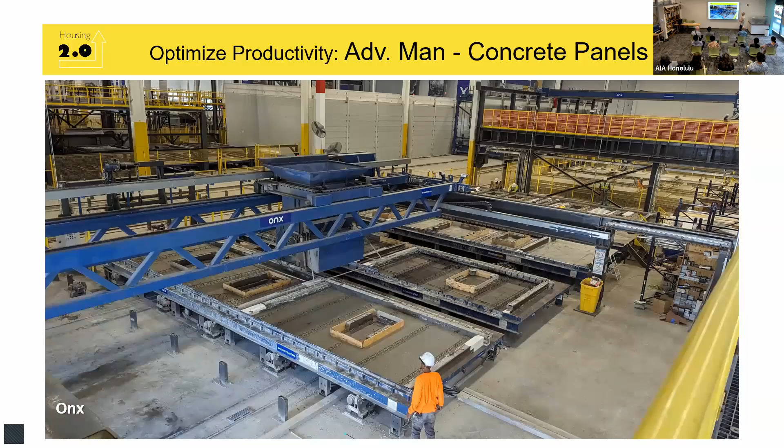This is a plant I visited in Fort Lauderdale, Florida, but again, similar tropical climate. They pour 2-inch slabs, all done with robotics. The forms are all created with robotic technology. And then it's all driven by computer drawings for the architectural design. And then it's steam cured at 10,000 psi. Now, normal concrete is 3,000 psi. It is bulletproof, moisture or anything going through.

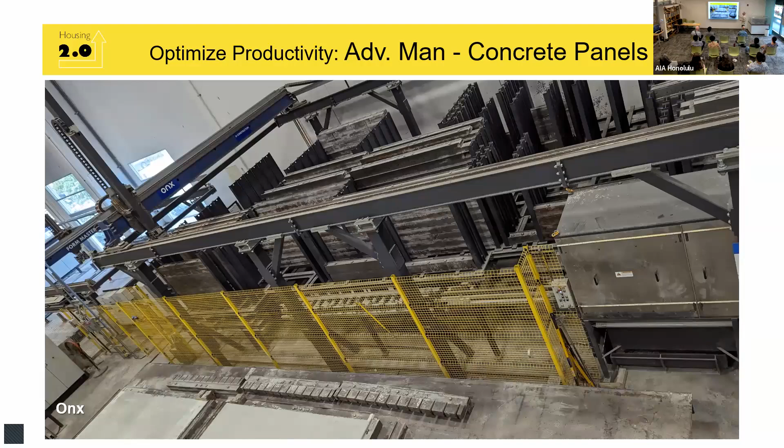And it's assembled into a sandwich panel with R5 insulation. So it's roughly just what you want here in Hawaii. And then it's all storage, order, installation, ship to job site, and there they are. This is a bulletproof home. You're going to have 150, category 5 hurricane, 150-mile winds, flying debris, nothing is going to damage your home.

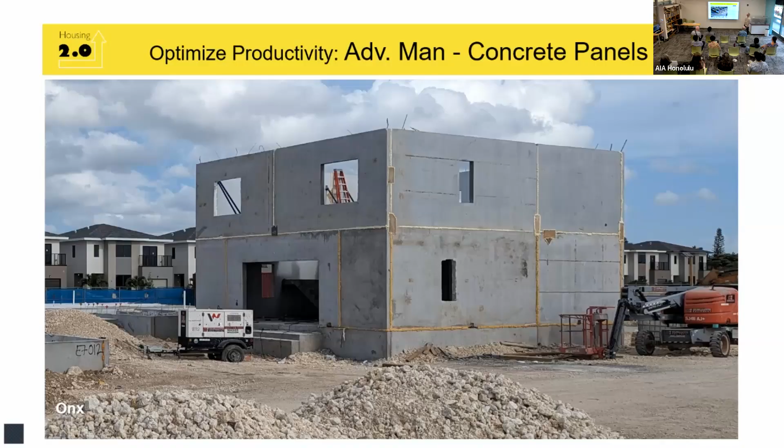What's the price point for this? It's $500,000. It's lower cost than the other frame homes it's competing against in this market.

Would you ever bring a plan for a car to a car dealership and say, I want this car, build it for me, and then expect them to make the car from your drawings that you can afford to buy?

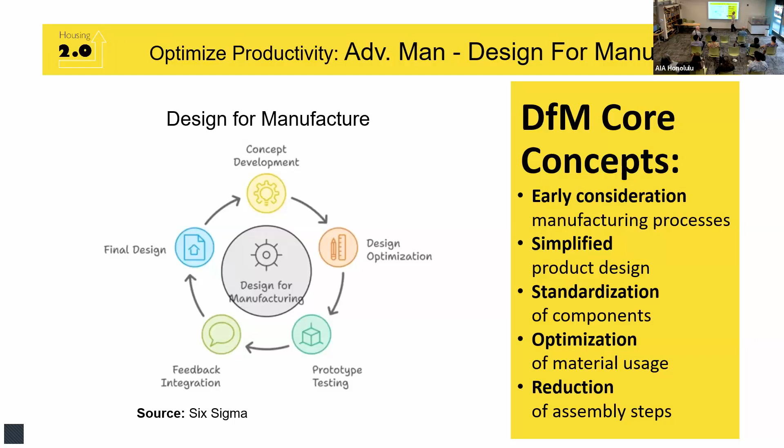It has to be mass custom, mass produced, designed for manufacturing, digitized the way I showed you. So every part of the system is optimized, every component of the car, everything has to be designed for manufacturing. And it's not being done today, except for those who do it, and then designed for assembly.

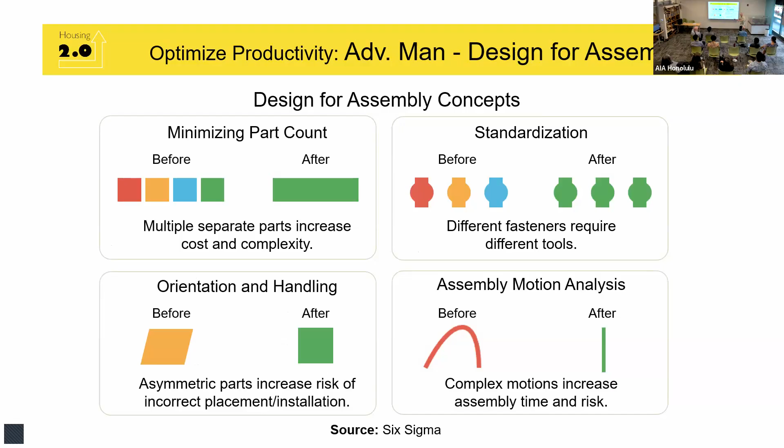So the poison pills that are plaguing advanced manufacturing: a lack of design for manufacturing, lack of design for assembly, lack of setup solutions are creating friction, so builders don't want to use them because they have to figure out what to do with the panel. Lack of whole product solutions—who's going to frame the rest of the house? How do I make it work with the panels that you give me? And all the uncertainty, the lack of how you integrate with the trades, the learning curve—there are so many issues.

There are ways of attacking all these so this will work. But if this is just not done, it's an afterthought—it's almost doomed to failure. So what's the affordability recommendation? I'll leave you with this.

Well, let's tee this up. This is what happens with innovations. In 1908, a car was $30,000 in 2025 dollars. Then, as Howard told you so eloquently, Henry Ford came along with the innovation of the assembly line, and the cost dropped to about $5,000. Personal computers in 1971 were about $6,000. Now today, with all the advanced chips and electronics, it's down to $200.

Television sets, color TVs in 1973 were about $2,800. Now it's just $200—all the advanced electronics, everything went into it. Housing in 1950 was $98,000 in 2025 dollars. In 2025, it's $420,000... Hawaii is $1.2 million. Here's what happens when you innovate: you get 80-90% affordability gains.

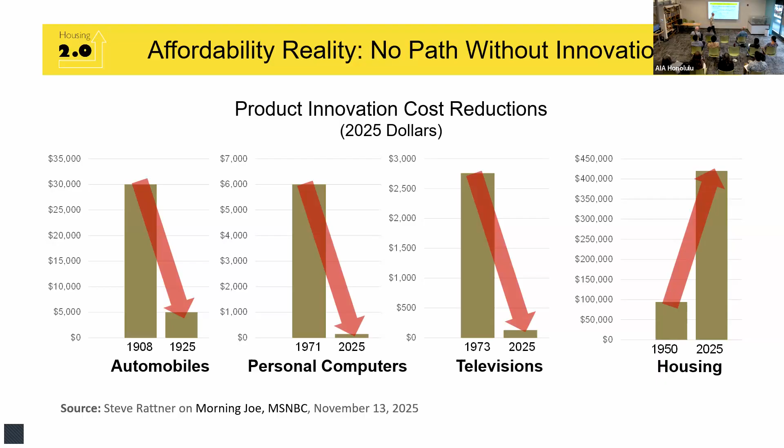Now, without it, you have this exponential increase, a lack of affordability. So my recommendation, just to leave you with some food for thought, is there's no plan for affordable housing without innovation. So let's innovate, and government can do a lot of things to help us out.

They can develop and apply a lot of what's working in cities that are having tremendous success with affordable housing—Singapore, Vienna, other cities are doing amazing things. Let's learn and apply what they're doing: regulation policy, land acquisition policies, financing policies. There are tremendous tools that these other cities have developed. Let's team up with government to figure out how we make these work for us so that it's easier to build homes.

But on the product side, let's disseminate these optimization skills that we're starting to touch on today. Let's do trainings and workshops and charrettes and design studio projects where we actually apply and make these optimization techniques work. I recommend an affordable design competition where you have to apply all these skills to an advanced manufactured solution, so you get both savings from optimization and advanced manufacturing. Have maybe the best designers in the country come up with various advanced manufacturing providers.

And then let's accelerate advanced manufacturing. Let's evaluate all the options—okay, what's best for Hawaii? Maybe a wood option and a concrete option, or just wood options, or two concrete options, or modular and panels. Let's figure out what works best here based on housing needs.